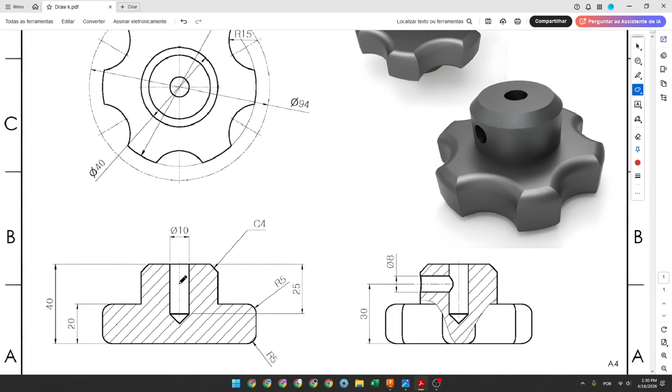The first step to create this part, we will select the front plane and create this sketch. The first thing we make is a center line here with 40 millimeters of length, and create this line here with 40 millimeters of length. This line here, the distance is the radius of this diameter.

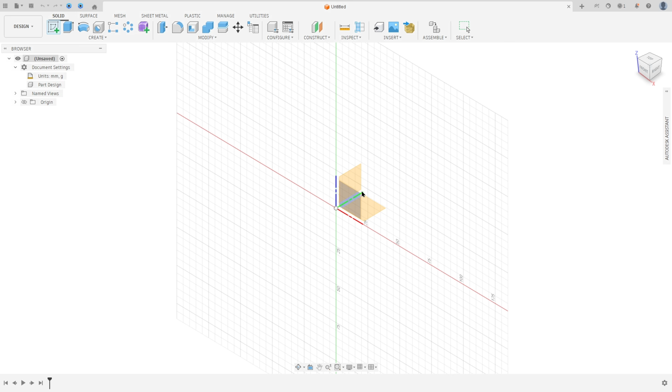So open Fusion, go to create a sketch and select the front plane. Select line, click here in the midpoint, make a line here with 40 millimeters, and create another line here. Go to constraint, select equal, make these two lines equal because they have the same length.

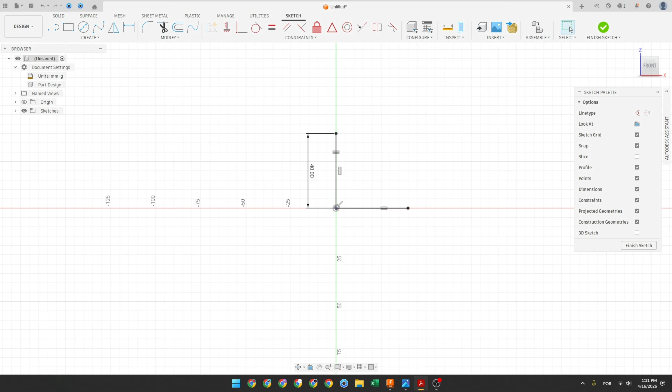Now we will create this line here with 20 millimeters. The fillet here and here we will make later, okay? So create this line with 20 millimeters and create a line here. Click here in this point, 20 millimeters, and create another line here.

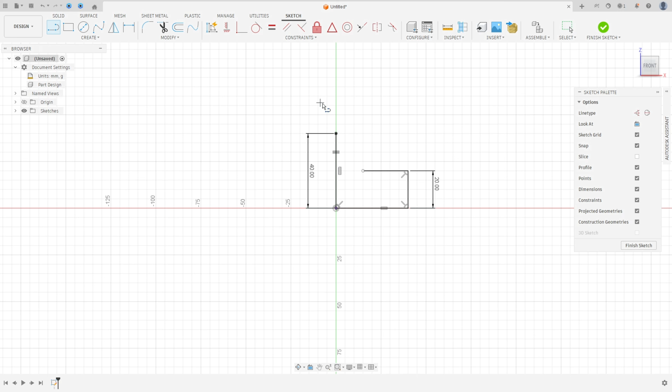Now we will create this line, the chamfer here, we will make this later, and we will create this line here. The distance between this line and the center line is 20 millimeters, the radius here. Go to sketch dimension, the distance here is 20 millimeters.

Okay, so finish the sketch and go to Revolve. The axis, select the center line here, operation new body, and press OK. We made this one.

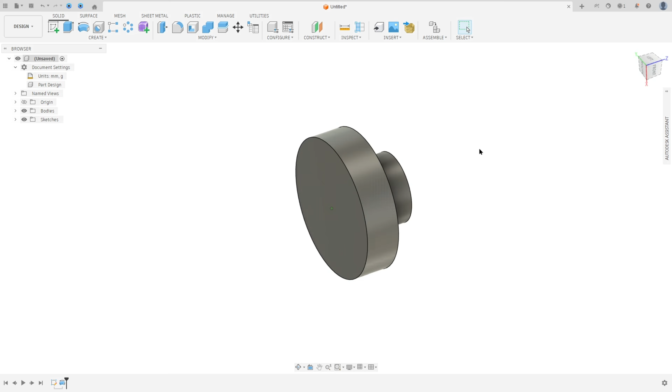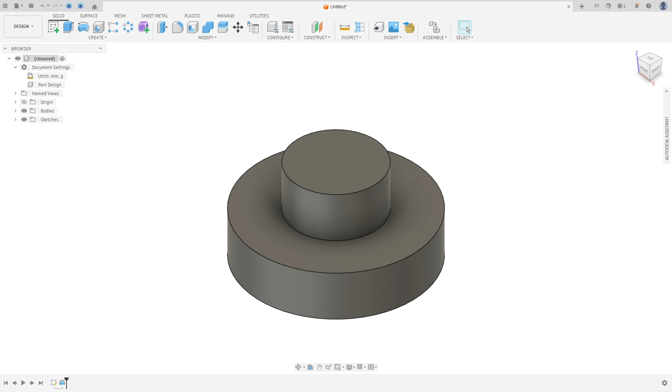Now we will select the bottom face here and create this sketch. The first thing we make here is a circle with 94 millimeters of diameter, and create a center line here. So go to create a sketch, rotate this part a little bit and select the bottom face here. Select the circle and activate the construction line type.

Click here in the midpoint. The circle has 94 millimeters of diameter. Select line, make a line from the midpoint to this circle. This line must be a vertical line, okay?

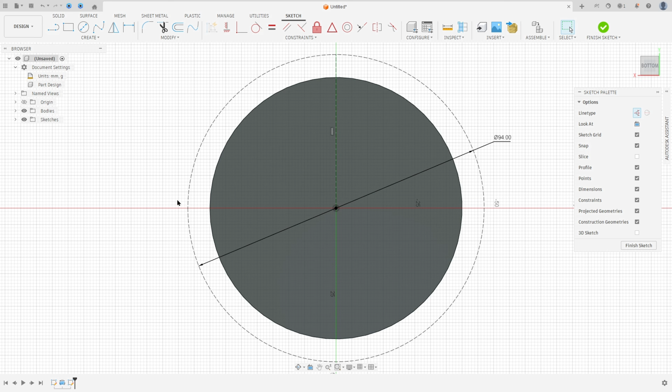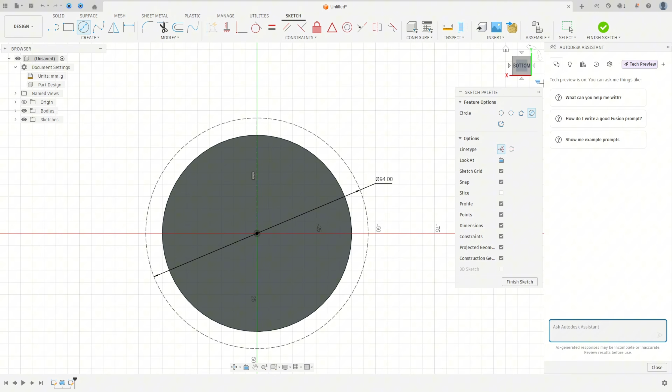Now we will create a circle here, and the center of the circle will be this point. The radius of this circle is 15 millimeters, or 30 millimeters of diameter. So select the circle and remove the construction line type. Click here in this point, make a circle here with 30 millimeters of diameter.

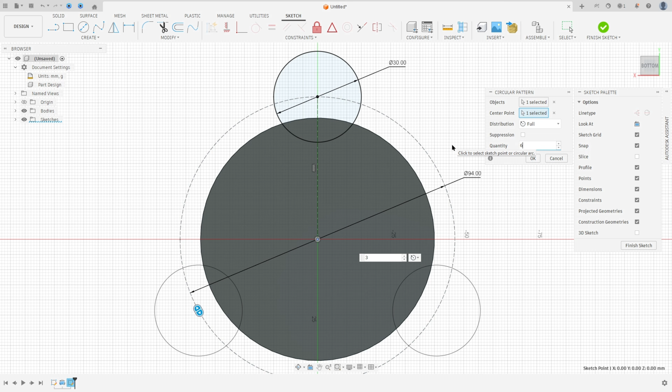Now we need to create 5 more circles, so to create this we use the circular pattern. Go to create and select the circular pattern. The object, select the circle, and the center point, select the midpoint. The quantity here is 6, and press OK. We made this one, so finish the sketch.

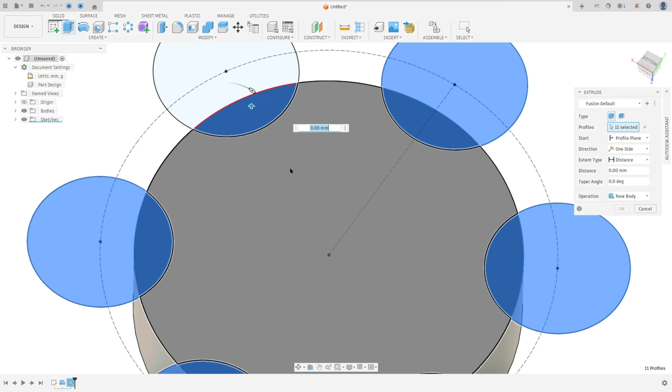Now we need to create a cut here. So go to Extrude, select all the circles, make sure to select this area. The extent type, select all and flip the direction. Operation cut, and press OK. We made this one.

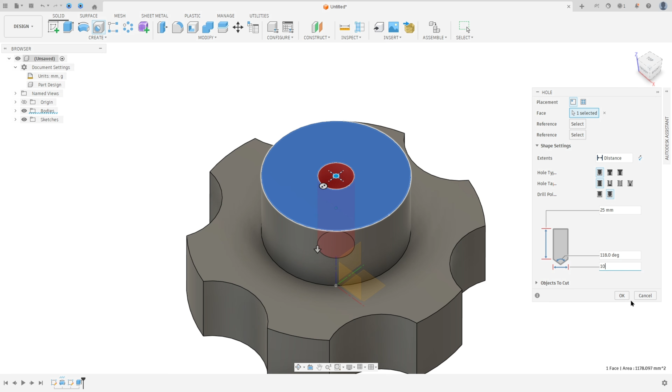Now we will make this cut here, this hole. This hole has 10 millimeters of diameter and the length is 25 millimeters. We don't have the angle here. So go to hole, select this face, and for reference select this arc to make this concentric. The hole type, select simple, the drill point, select the angle, and here the depth is 25 millimeters, and the diameter is 10 millimeters. Press OK. Let me make a section analysis here to show you.

Now we will create this hole. We have a hole here with 8 millimeters of diameter, and the distance between the center of this hole and the midpoint is 30 millimeters.

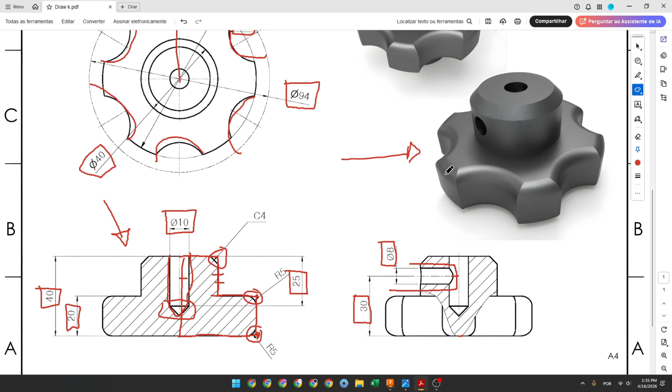So we will select the front plane to create a sketch. Go to create a sketch and select the front plane. Select a circle, make a circle here in the center with 8 millimeters of diameter. Go to sketch dimension, the distance between the center of the circle and the midpoint is 30 millimeters. Go to constraint, select horizontal vertical, select the center of the circle and the midpoint.

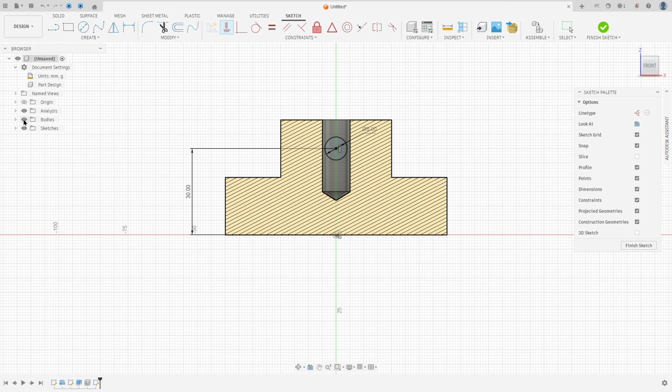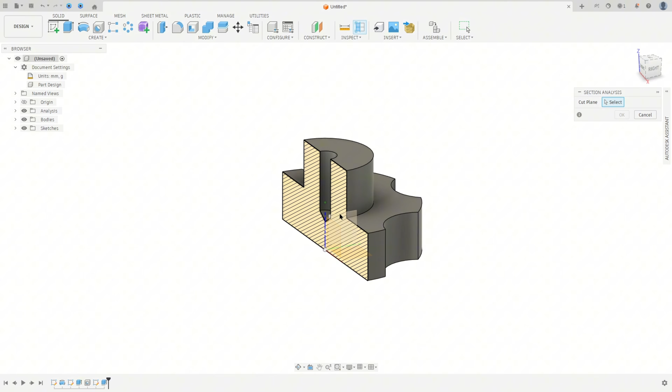We made this one, so finish the sketch. Let me hide the analysis here. Go to Extrude, and the extent type, select all and flip the direction, operation cut, and press OK. We made this one, let me rotate this analysis here. We made this one, okay.

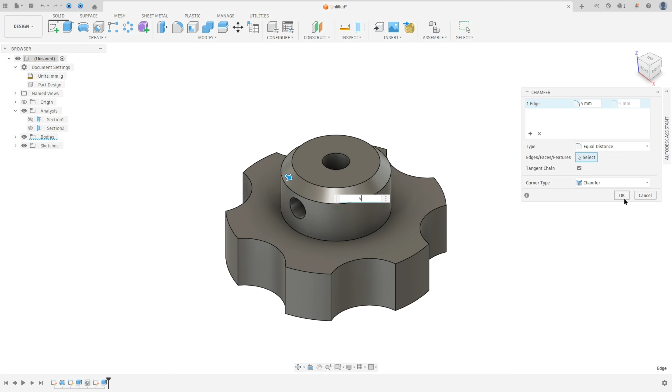Now we will create the chamfer. We have a chamfer here with 4 millimeters, equal distance. So go to modify and select the chamfer, select this edge, the distance here 4 millimeters, the type equal distance, and press OK.

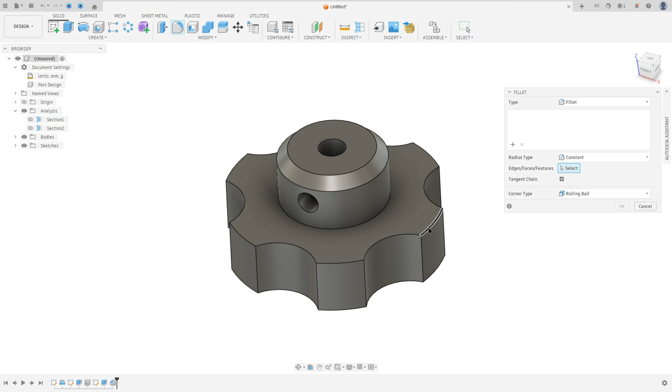Now we will create the fillet. We have a fillet in this edge here with 5 millimeters of radius, and we have a fillet here, look at this. So go to fillet and select the bottom face, and select this edge here. The fillet here is 5 millimeters, and press OK. We made this one.

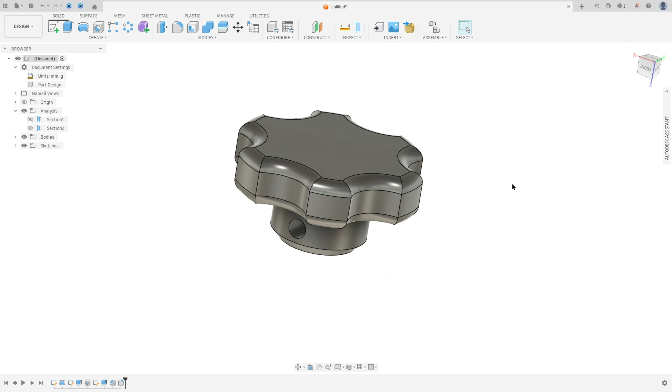So here we finish our exercise.